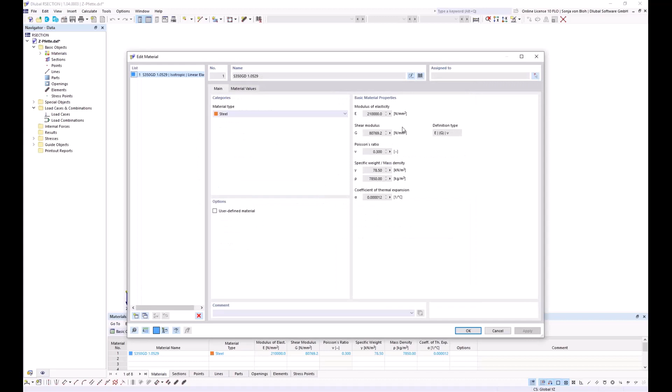Furthermore, I have to define the material here. I just want to use this material that's already shown here, but if I want to use a different material, it would be possible to open the material library and select the material from there. Okay, click here on Cancel. Then I start the import process and click on OK.

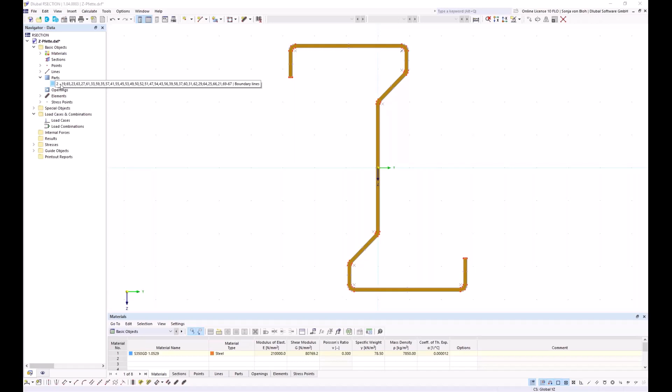With this import function, the part is created automatically, and also the elements are created automatically that you can see here. The elements are required for the calculation using the thin walled analysis and for the calculation of the effective cross-section.

I now want to go into the base data, and here I choose the analysis method. Two analysis methods are available: the finite element analysis and the thin walled analysis. I choose the thin walled analysis. As already mentioned, elements must be defined for this. This setting only affects the default setting in RSTAB. If necessary, I can change the analysis method in RSTAB.

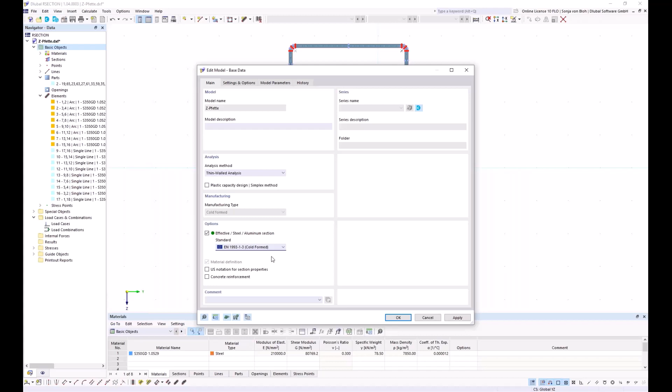Furthermore, I activate the add-on Effective Steel Section, and I choose the standard Eurocode 3 Part 1.3 for cold formed cross sections. This setting is necessary so that the steel design in RSTAB is carried out according to the standard for cold formed cross sections. Then I click on OK.

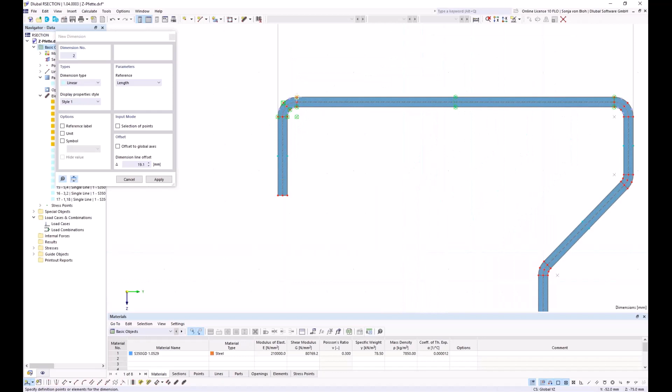It's also possible to dimension the cross section. I will do this. For this, I create a new dimension, and then I choose the corresponding points. These dimensions can also be displayed in RSTAB.

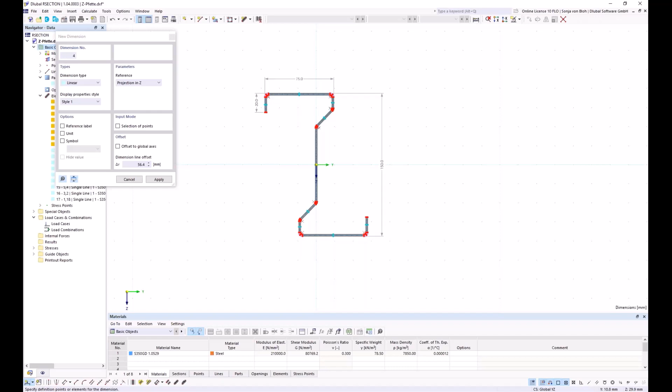In RSECTION, I can also calculate the effective cross-section and the stresses. This is useful, for example, for a preliminary design. This has been demonstrated in previous webinars, so I won't go into it today. However, it makes sense to start the calculation once to find any modeling errors. I will do this. Here I go to Calculate All, and no error was shown, so it's possible to import this cross section into RSTAB.

Then I save this file. Click here on Save, and I will save it in this directory. Then I can switch to RSTAB.

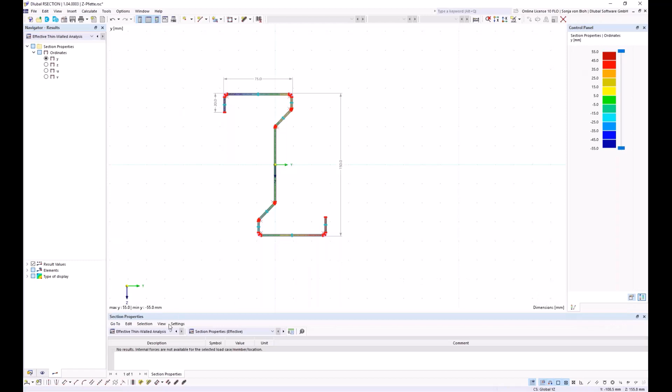I have already created the steel hall in RSTAB. The purlins consist of the cross section just created in RSECTION. For now, I have assigned this cross section to them, and I want to modify this cross section.

For this, I open the Edit Section dialog, and then I open my cross section library. And then I want to import my created cross section in RSECTION.

The folder in which the RSECTION cross section is stored must be integrated into the Dlubal Center. It's only possible via the Dlubal Center to import a cross section from RSECTION. And I want to put this folder directly under the project.

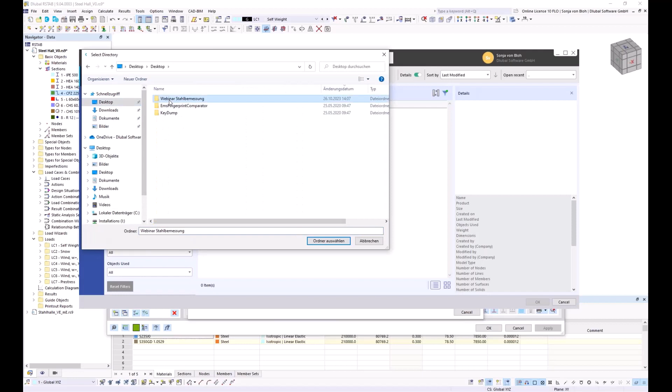So I right-click, choose Add Existing Project here from the context menu, and then I choose my folder. It's here on the desktop. And then I click on OK.

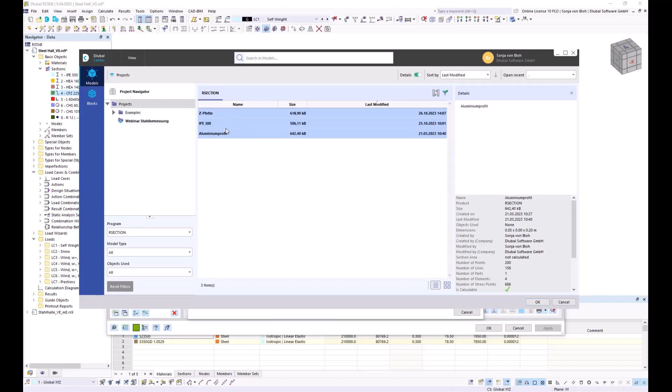The folder is now linked to the Dlubal Center, and I can select the R section cross section. It has recently become possible to import multiple cross sections in one step. For this, I have to select this cross section, and then I can click on OK, and all the selected cross sections will then be imported into RSTAB. Now I only want to import this cross section, so I click on OK.

Here the checkbox thin-walled model is activated. This setting was taken from the chosen analysis method in RSECTION. However, I can also deactivate this option here so that the calculation of the gross cross-section properties is then carried out using the finite element analysis. If this option cannot be selected, then no elements are defined in the R-section cross-section.

You can see here in the graphic of the cross-section that the dimensions are shown. These are the dimensions I have created in RSECTION. And I click here on OK.

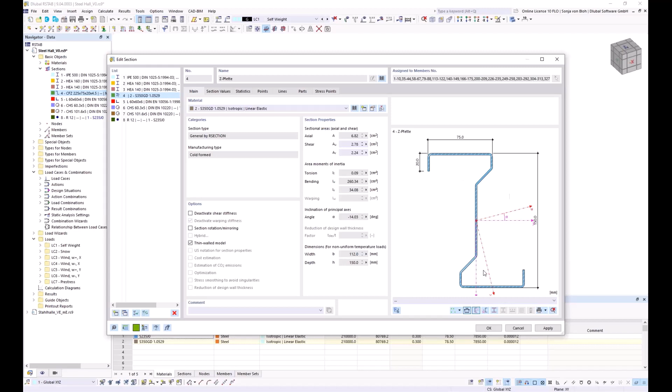For cold-formed Z cross-sections, the center of shear lies outside the cross-section and the main axes are rotated. Usually, the loads don't act on the shear center, which results in double bending and torsion. Usual lateral torsional buckling checks cannot be carried out.

Eurocode 3 Part 1.3 includes design methods for cold-formed Z purlins, but the purlins must be within certain limits. These simplified design methods are not implemented in steel design. The lateral torsional buckling of any purlin can be carried out according to the second order theory, considering warping torsion and the use of equivalent imperfections. I would like to show this approach today.

For the calculation considering the warping torsion, I first activate the add-on warping torsion in the base data. For this, I go to the base data, on top add-ons, and then I activate this checkbox here.

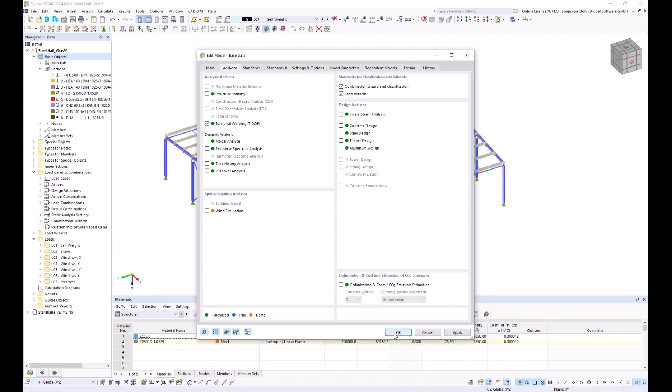Warping at the member ends is assumed to be unhindered by default. To transfer the warping between members that are connected, you can define a set of members.

The frames consist of several members. You can see it here. These members are divided, and this means that there are warping releases between each member.

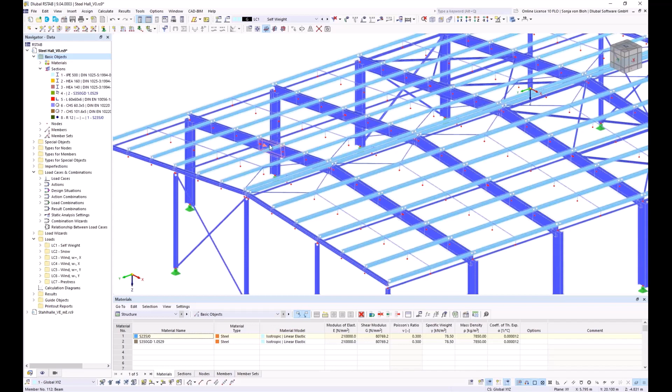The warping should be continuous for the frames, so I've already defined a set of members for them.

I show you this in the wireframe model. Here I've created the set of members for each frame. And if I open the edit set member set dialog, then you can see here a checkbox discontinuous torsional warping.

This option controls whether the warping should be transferred or not. This is supposed to be transferred, so I don't check this checkbox.

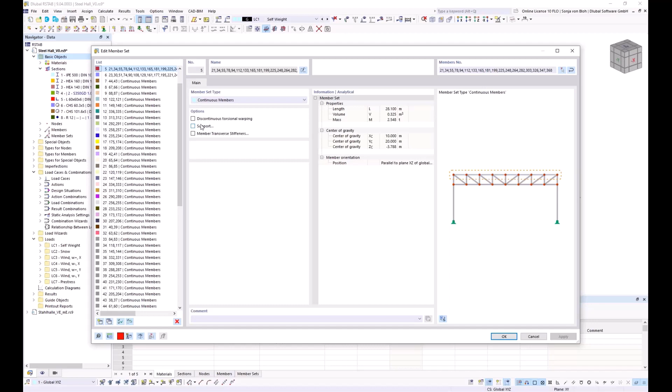Furthermore, the purlins are divided at the connection point here with the purlin suspensions, and the warping should be continuous for the purlins. So I've defined set of members for the purlins too. You can see it here.

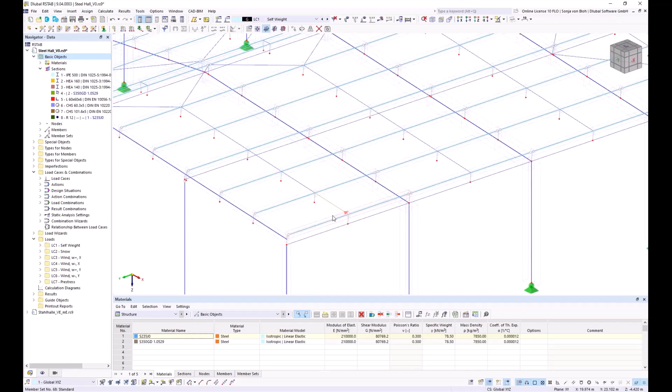When calculating with 7 degrees of freedom, the connection of members is always assumed to be at the center of gravity. If the connection is to be made at a different point, you can use member eccentricities, or you can also model the connection with rigid members.

In the steel hall, I have already defined member eccentricities for the transoms, the purlins, and the purlin suspensions. To do this, it's necessary to activate the checkbox eccentricity in the member dialog.

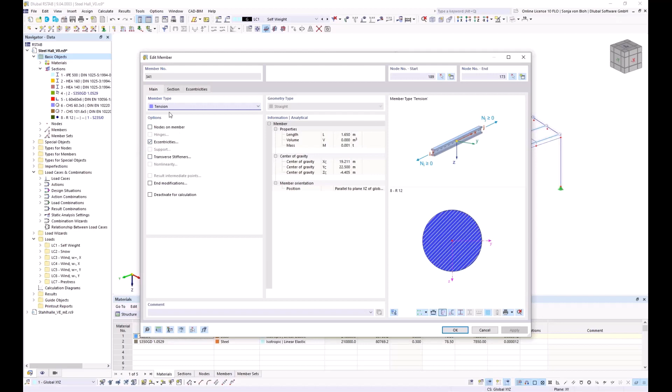I have done this here for the suspension. Here I've activated this checkbox eccentricities, and here in the tab eccentricity, it's possible to assign a member eccentricity to this member. And I want to also look into this definition of the member eccentricity.

You don't have to calculate the eccentricities manually. You can also define them relative to another cross-section. I have used this option here. I have defined the eccentricity type relative to sections, and I have defined a transverse offset from the section of another member, so that the eccentricity is calculated automatically via the program.

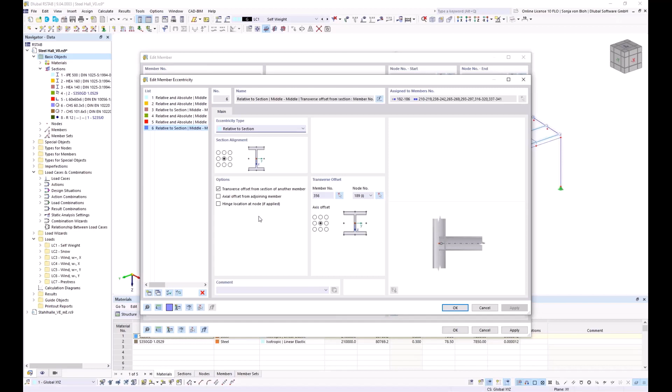The steel hall is covered with trapezoidal sheeting. I would like to use the trapezoidal sheeting as lateral and torsional support. I can take this stabilizing effect into account in RSTAB using shear panels and rotational restraints.

I first define the shear panel. I can do this via the navigator data. Here under types for members, I see member shear panels. I create a new one. There are different types of shear panels to choose from: trapezoidal sheeting, or a bracing, or trapezoidal sheeting and bracing. I want to define a trapezoidal sheeting, so I choose this type.

Then I go to the tab trapezoidal sheeting, and I choose the trapezoidal sheeting from the library. I go here, and then I define this trapezoidal sheeting. It's a Hoesch T50.1 0.75. I click on OK.

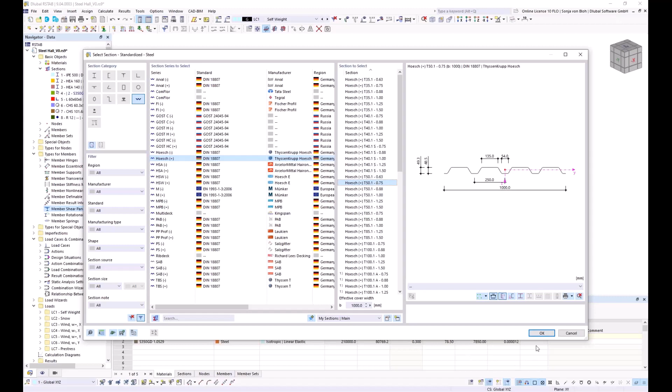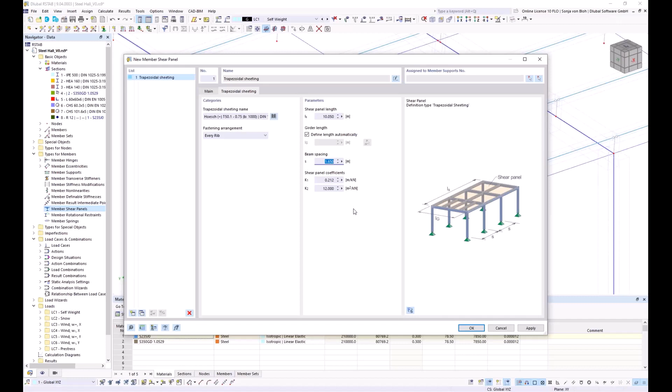The trapezoidal sheeting is fastened in every rib, so I choose this option here. The shear panel length corresponds to my roof length, and I can pick this graphically. I choose measure, then I choose my nodes, and now the shear panel length is defined as 10.05 meters. Then I have to define the beam spacing. I will do this also graphically. I measure the spacing between the purlins, and then I click on OK.

Next, I define the rotational restraint. I find this also in navigator data here. I create a new member rotational restraint. There are different rotational restraint types, continuous or discrete. For the trapezoidal sheeting, the restraint type is continuous.

Then I go to the tab continuous. The trapezoidal sheeting and the material can then be selected from the database. The purlin spacing and the continuous beam effect still need to be selected. The spring stiffness C100 must be determined depending on the load.

Unfortunately, the effect of cross-section deformation on rotational restraint can only be calculated for I cross-sections, but not for Z section cross-sections. The calculated spring stiffness would therefore be on the unsafe side, so I have determined the spring stiffness manually according to the formulas described in Eurocode 3 part 1.3.

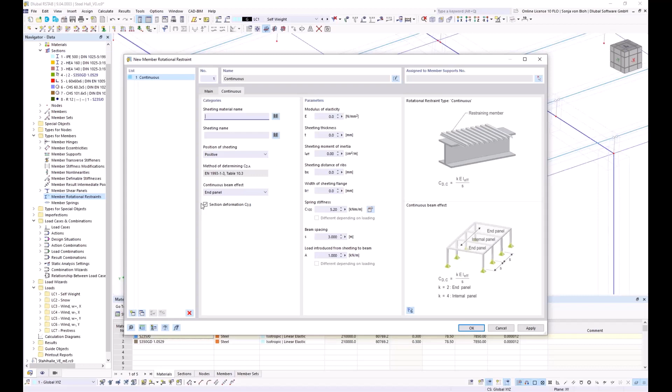I would like to consider the spring stiffness, so I go back to the tab main, and then I choose here the type manually. I define the rotational spring stiffness. I've calculated it to 1.07 kilonewton meter per meter.

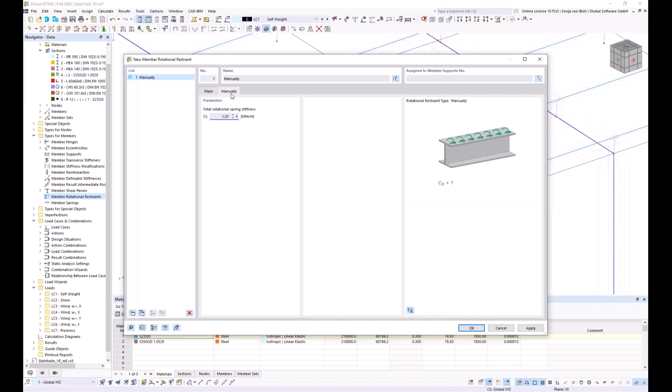I click here. I now have to assign the shear panel and the rotational restraint to member supports. I'm creating a new member support. I will do this also via the navigator data. I create a new member support, and then I choose my shear panel in Y and my rotational restraint about X.

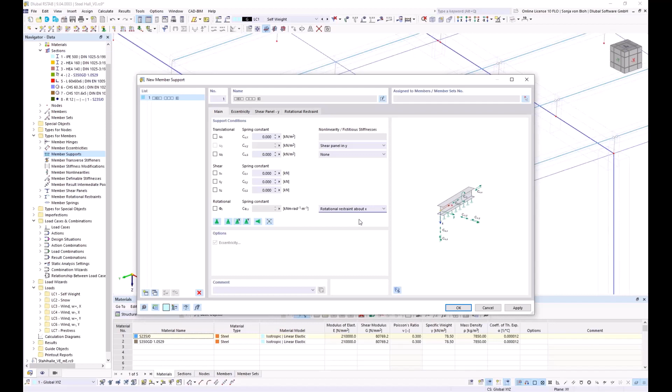The trapezoidal sheeting lies on the top of the purlin, so I define an eccentricity, and here I define the reference on the top. Then I go to the tab shear panel in Y. Here I choose the shear panel type I've just created, and I will do this also for the rotational restraint, choosing the manually defined rotational restraint.

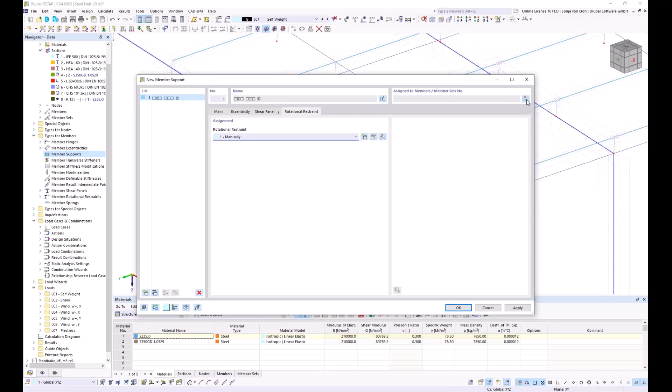I now assign the member support to the corresponding members. To do this, I click on Pick Members, and I use visibility for it. Here I use a generated visibility. I choose the cross-section of my purlin. Then I activate the visibility, and then I choose my members. Then I click OK and OK, and then the shear panel and the rotational restraint are assigned to these members.

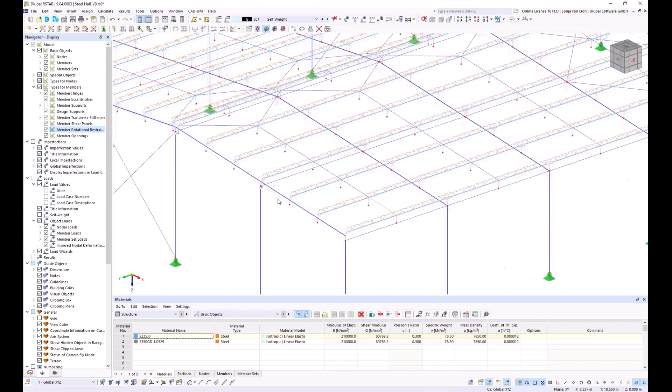It's also possible to display the rotational restraint and shear panel graphically. To do this, I go to the navigator display, and you can find the checkboxes under types for members. I activate member shear panels and member rotational restraint. I will see it if I cancel the visibility mode. Here you can see now the shear panel and rotational restraint graphically. I can uncheck these checkboxes again since I don't need it now.

By default, rotational restraint and shear panel are not taken into account in the static, stability, and modal analysis. I can also take these into account in these analyses by using a structure modification, and I want to create this structure modification. I find it in navigator data under special objects, and here I define a new structure modification. The consideration of shear panels and rotational restraints is already activated here via this checkbox, and then I modify the name of this structure modification.

I name it consider shear panel and rotational restraint.

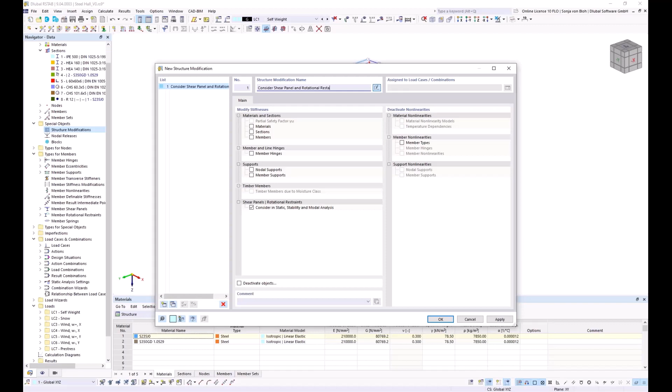I click on OK. I then have to assign this structure modification to the relevant load cases or load combinations in which it should be taken into account. For this, I use the combination wizard, found in navigator data. The only thing I have to do is check the checkbox for considering structure modification, and choose the corresponding structure modification.

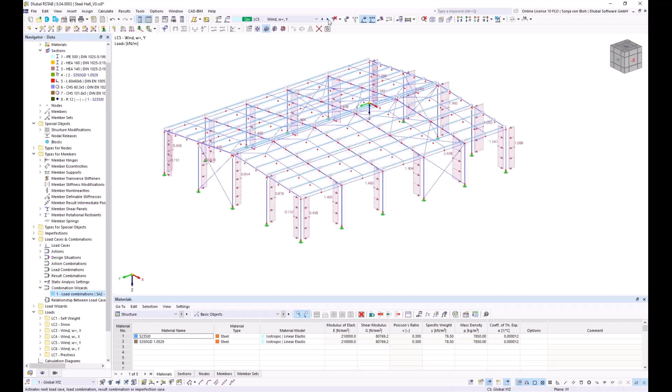I click on OK. I've already defined dead load, snow load, wind in X direction and Y direction. I will show you this by activating the view. Here I have the load case self weight, then snow, also wind in X direction and Y direction, and also a pre-stress on the bracings.

I want to go back to my loads that I've applied on the purlins. If a member load without eccentricity is defined, the load always acts at the center of gravity in the calculation with 7 degrees of freedom.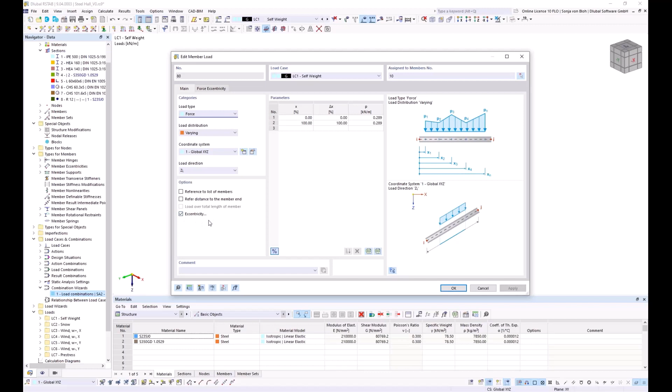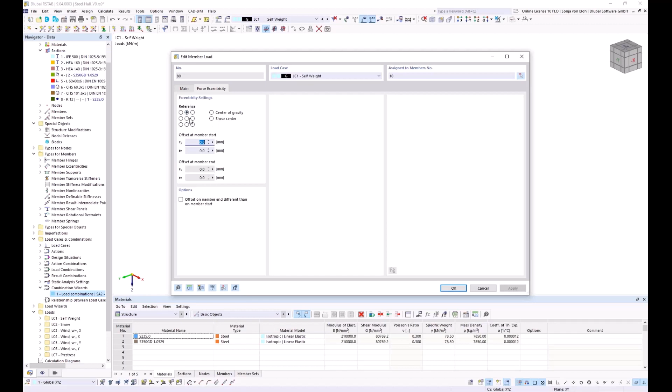I will go into this load, and here I have the possibility to define an eccentricity. If the load acts on another position, it's possible to change this via an eccentricity. I've activated the eccentricity checkbox, and in the force eccentricity, it's possible to define the eccentricity for the loads. The load should act on the top of the cross section, so I've defined the reference on the top. Click here, okay.

I've already created global imperfections. I will show you this now. I've created global imperfection in plus X direction and also in plus Y direction. I now have to define the initial bow imperfection for the purlins.

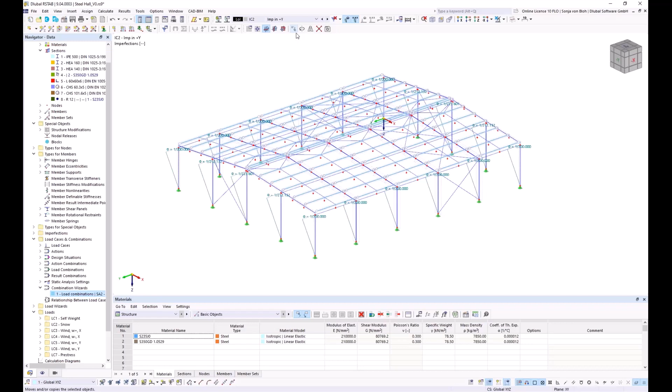Various options for defining imperfections have already been demonstrated in previous webinars. Today, I would like to show the definition of local member imperfections. The purlin is here supported in a Y direction by the purlin suspension, so that a two-wave imperfection shape would be possible. If the suspension is not stiff enough, it would also be possible to have a single wave imperfection shape. For the imperfections, I could now create two imperfection cases.

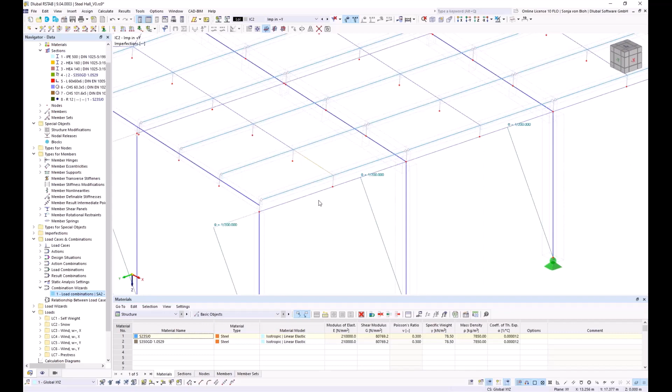However, it's also possible to use a stability analysis to obtain information about the imperfection to be applied and thus reduce the number of imperfection cases. I would like to show this now. I go to my navigator data, then to base data, and here I activate the checkbox for structure stability. Then I click on OK.

I first look at the stability analysis settings by opening this. I assume that local mode shapes for the purlins only appear at higher eigenvalues. Therefore, I increase the number of eigenvalues to be calculated to 25.

In the combination wizard, I activate the stability analysis with the calculation of 25 eigenvalues, and I also change my static analysis settings to first order theory. Then I name this wizard stability.

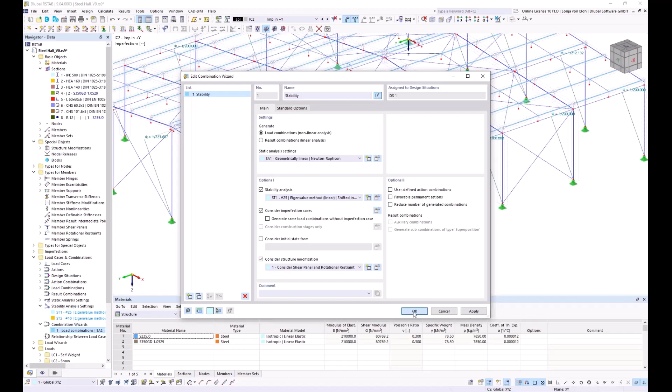I open now the design situations, and here the combination wizard stability is already chosen. Now the load combinations are generated considering the global imperfection, my structure modification, and my structure stability add-on.

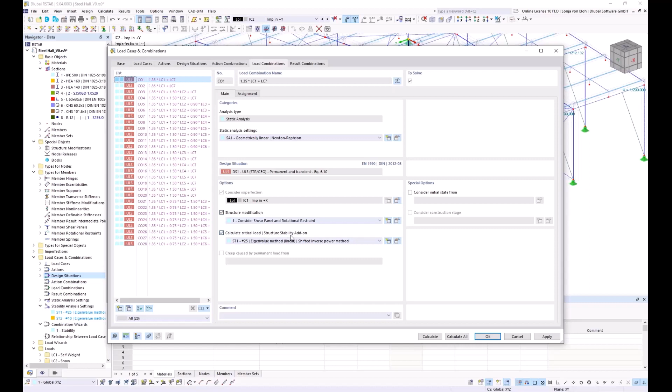I now run the calculation for my design situation 1. A message informs me that the cross sections or topology of the members in the member set are not compatible, and the warping may not be able to be transferred. The reason for this is, among other things, that the set of members of the frame is not straight.

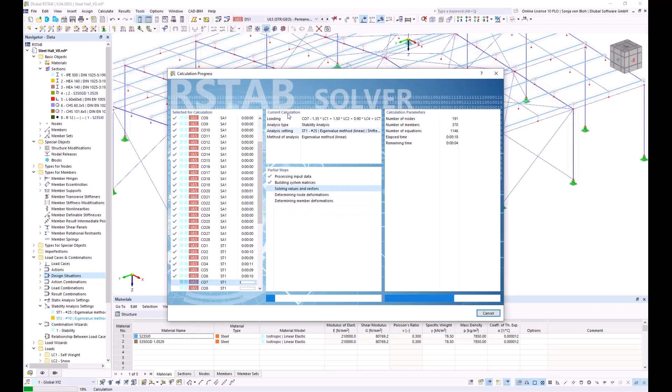You can see it here. The column is here angled to the other frame, and this is the reason for this warning message. I assume that the warping can be transferred through the connection, so I ignore this warning message, and the warping is then transferred.

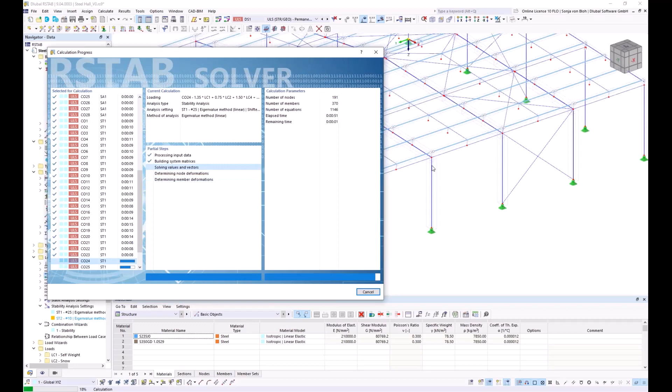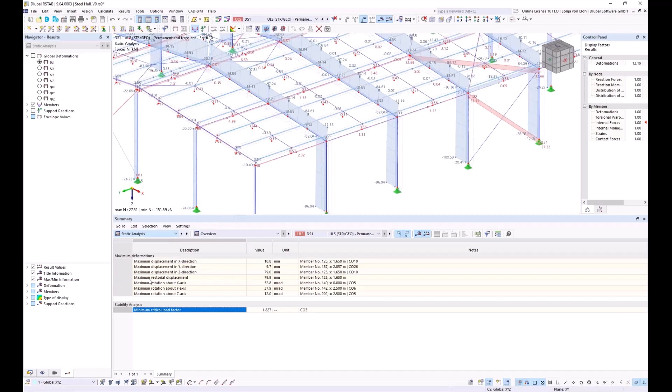Here on the overview, I can see that the minimum critical load factor is calculated in load combination 3. I will go to the stability analysis, and I will open now the load combination 3.

I deactivate here the display of the loads. As a part of the stability analysis evaluation by mode shape, the mode relevance factor can be used to quickly differentiate between local and global mode shapes. A mode relevance factor of 100% means that a single member has maximum relevance for the considered mode shape.

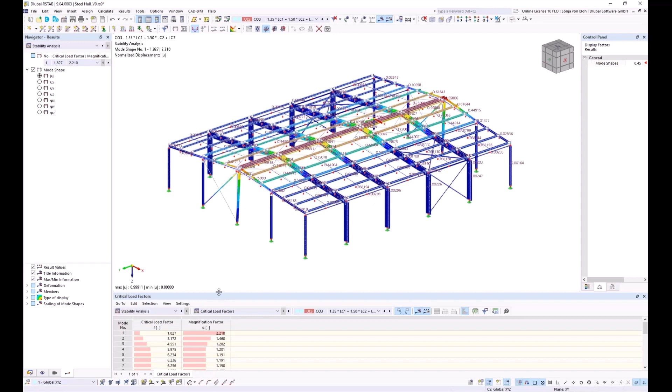To look into the mode relevance factor, I open a different table: results by member, and here effective lengths and critical loads by member, and you can see here this mode relevance factor for all members.

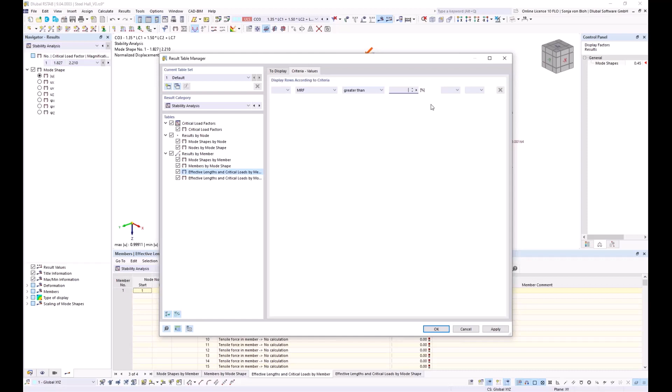I can also use the filter option to output only mode relevance factors that are greater than a certain value. I will do this now. Here I open the result table manager, and I activate this checkbox according to criteria. Here I can choose the mode relevance factor, and I want to see only mode relevance factors that are greater than 70%. I click here on OK.

And then I want to see here my member number 258, and this member has a mode relevance factor of 100%, and this means that it is a local eigenvalue.

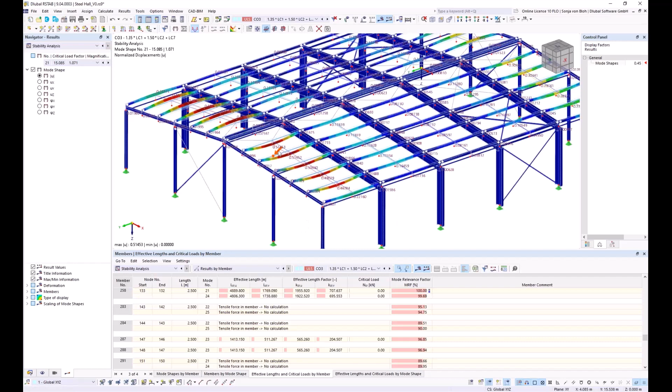And I can see for this also the mode shape, and this is a single wave here for this purlins. So I have only to define a single wave shape for the bow imperfection. I will do this now.

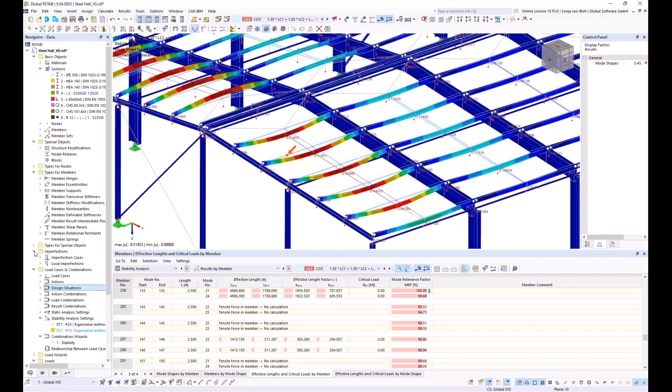For this, I create a new imperfection load case. To do this, I open the navigator data again, and then I create here a new imperfection case. I name it imperfection plus Y direction, and I choose here the imperfection type local imperfections.

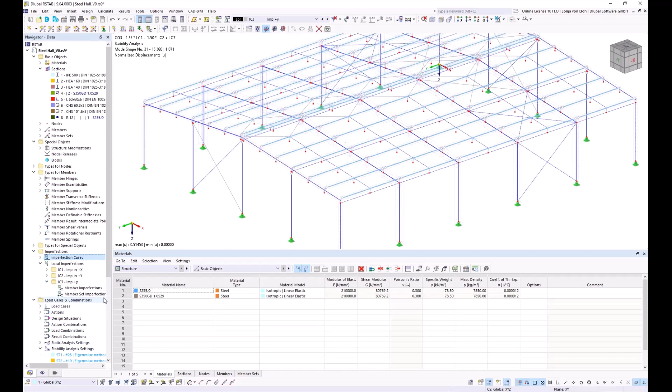I now have to define the local imperfections, and I define a new member set imperfections. And here I choose the imperfection type initial bow, and as definition type, I choose manually relative. And for the Z cross-section, I use according to table 6.3 of Eurocode 3 part 1.3, the buckling curve B, so that I define an initial bow of 1 divided by 250, and I want to assign this initial bow to the

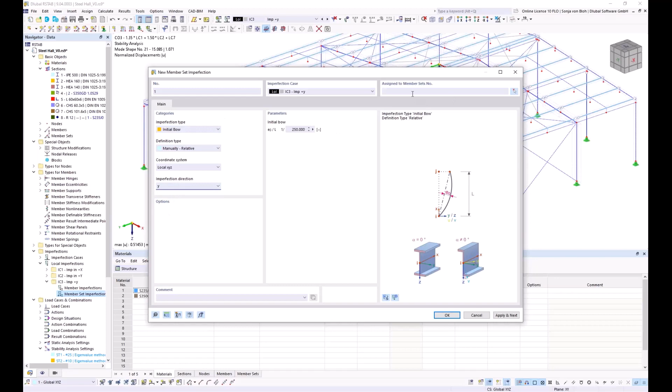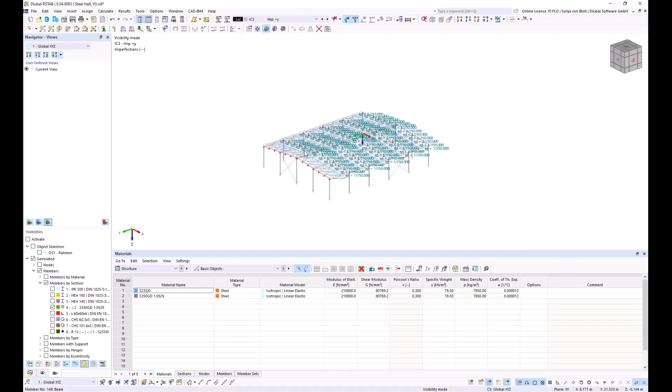imperfection direction Y. Now I have to choose the member sets, and I activate here my visibility once again. I choose then the member sets, and I click on OK. I can show this also graphically if I activate the Show Imperfection button.

And I now have to define the imperfection also in the opposite direction, and I will do this by copying the imperfection case, imperfection plus Y. To do this, I go to the navigator data again, and I open here my imperfection case. I choose it, and then I click on button copy selected imperfection case. I rename this case, and then I click on OK.

And all I have to do now is change the imperfection direction to minus Y.

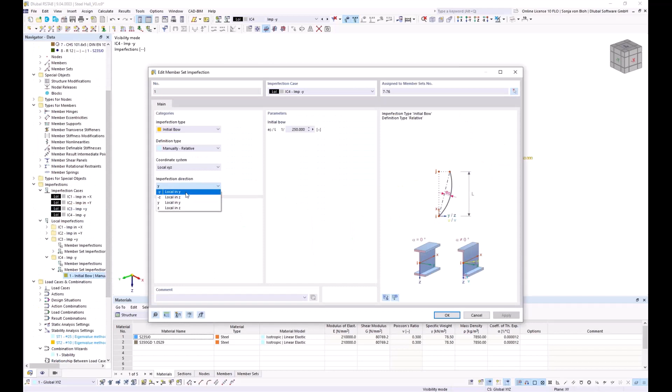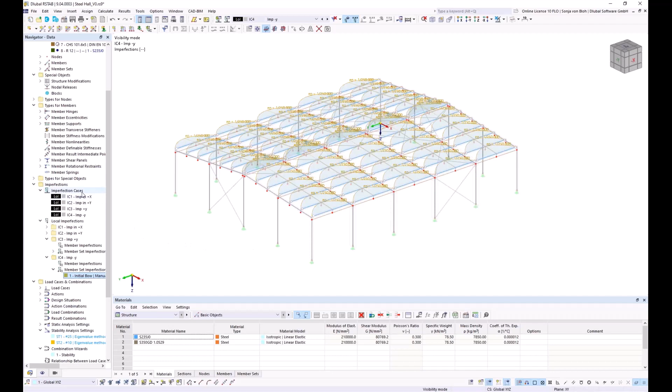I would now like to combine the imperfections with each other. For the combination of imperfections, I create a group of imperfection cases, and I will do this here in the Edit Imperfection Case window. Here I create a new imperfection case from imperfection type group of imperfection cases, and I want to combine first my imperfection in global X direction with my imperfection in plus Y direction.

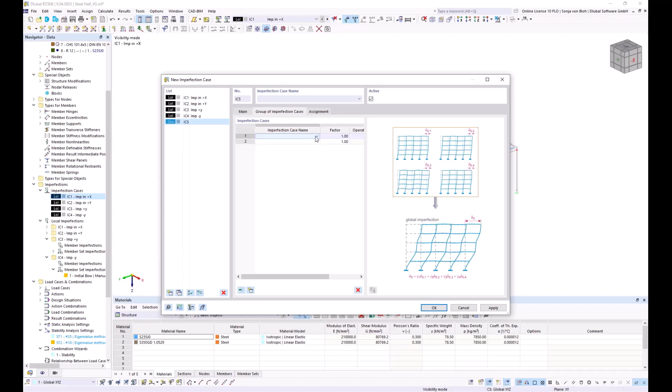For this, I go to the tab group of imperfection cases, and then I create a new line, and here I choose imperfection in plus X with the operator and imperfection in plus Y, and I name it imp plus X plus Y. The other imperfections I create by copying.

So I select this group of imperfection, and then I click here on copy selected imperfection cases. And here I change the parameters to minus Y, and I need this also for the global direction Y. So I copy this.

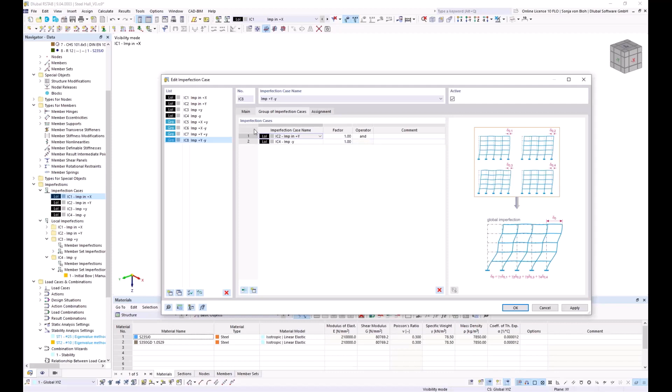And all I have to do is change here the name and the imperfection. So that the individual imperfections are not taken into account in the combinatorics, I deactivate for them the checkbox active, and then I click here on OK.

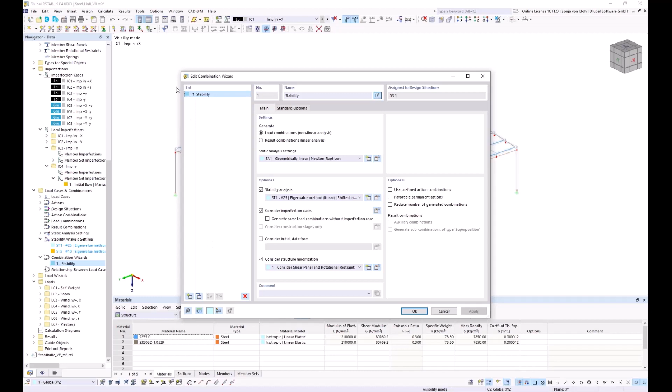Then I have to modify my combination wizard, or create a new combination wizard for my design situation. For this, I open the combination wizard dialog and I copy the stability wizard, and I name it here design. And I want to do my design according to the second order theory.

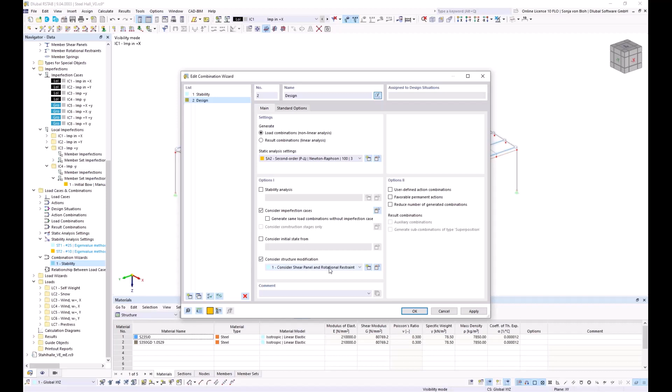So I choose here second order. I don't want to use the stability analysis anymore, and I want to consider my imperfection cases and my structure modification. Then I click on OK.

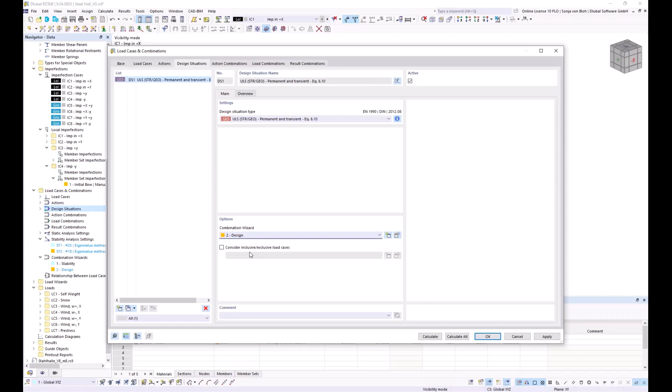I now have to assign this combination wizard to my design situation. For this, I edit my design situation, and here I choose now the combination wizard for the design. If I go here, then I can see the results for my load combination. Here the imperfections are considered and also the structure modification.

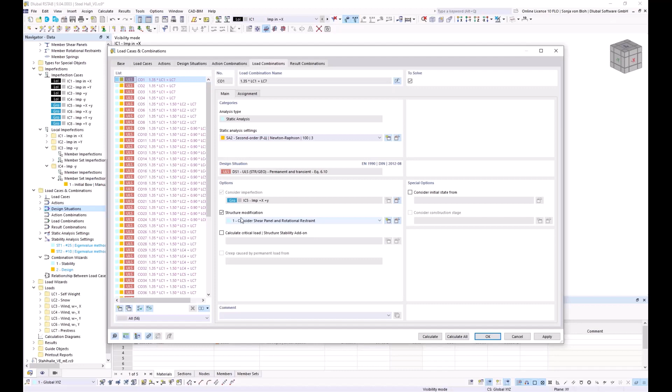The structure is complete so that I can make the settings for the steel design. For this, I first activate the steel design add-on in the base data. In the base data, here on tab add-ons, I activate here the steel design, and on the tab standards, I select the standard that I want to use.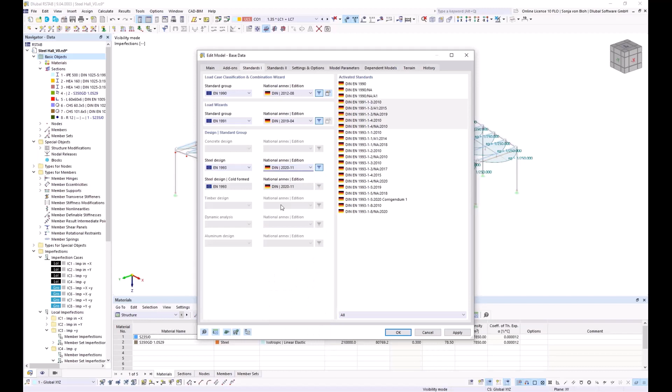I select here the Eurocode 3, and I select the German National Annex. And click then on OK.

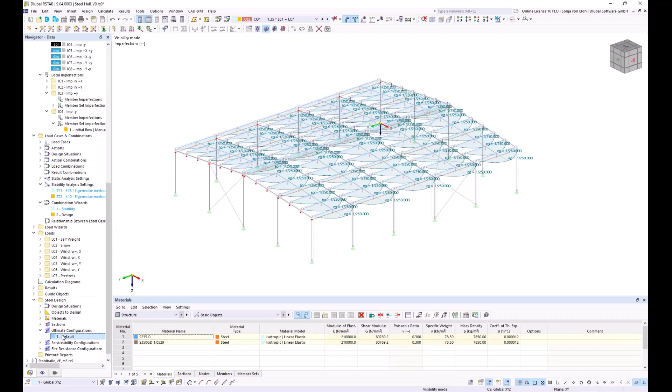I now want to look into the ultimate configuration for the steel design. I find it here also in Navigator Data, Ultimate Configuration. And here I deactivate the checkbox Perform Stability Design, since all stability effects are already included in the calculation.

Therefore, only cross-section checks have to be carried out, but with the partial safety factor gamma M1 for stability designs. For this, I have to activate this checkbox.

In chapter Design of Cold Form Sections, the steel design derives from the manufacturing type whether the design must be carried out according to Eurocode 3 Part 1.1 or Eurocode 3 Part 1.3 for cold formed cross sections. If I deactivate here this checkbox Perform Designs of Cold Form Sections, then the design would be carried out according to Eurocode 3 Part 1.1.

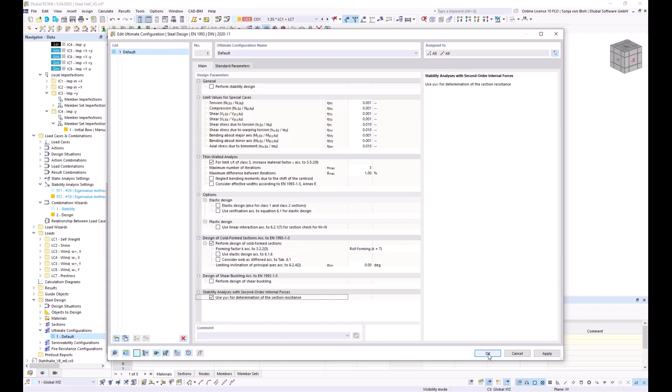Then I click here on OK.

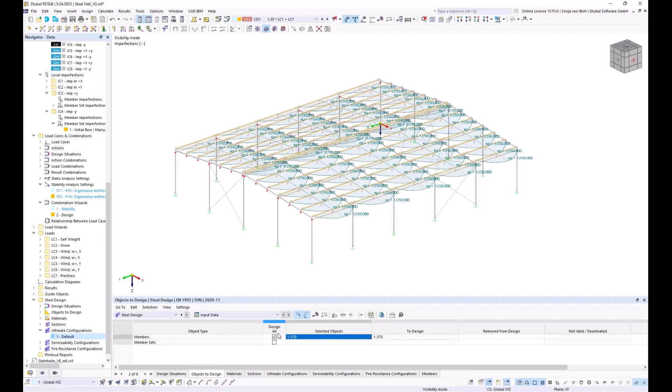In the table steel design, and in the add-on steel design tab Objects to Design, I choose the members that I want to design. I want to design all purlins. I deactivate the checkbox for member sets, and then I choose the purlins. I activate the visibility first, then select all my purlins, and click OK.

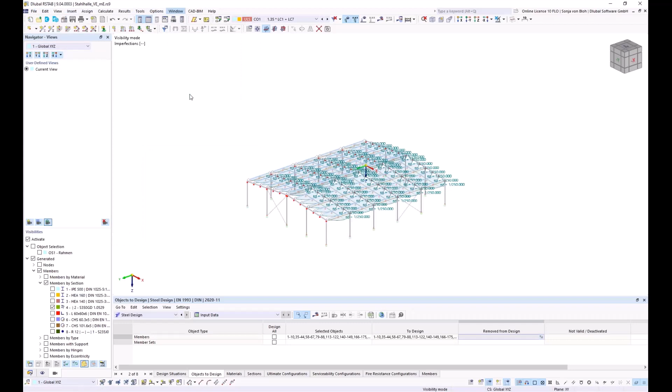The calculation takes time because the effective cross-section is calculated in an iterative process. I therefore show you the results in an already calculated model.

Here I go to the design ratios on members. In the table, the numerical results of the design are shown. To display the details, I double click on the corresponding table row.

Separate effective cross sections are calculated for axial force, major axis bending, and minor axis bending. According to information from the Standards Committee of Germany, the effective cross-section can also be calculated for the combination of internal forces in a design with 7 degrees of freedom using imperfections. We will implement this in the future.

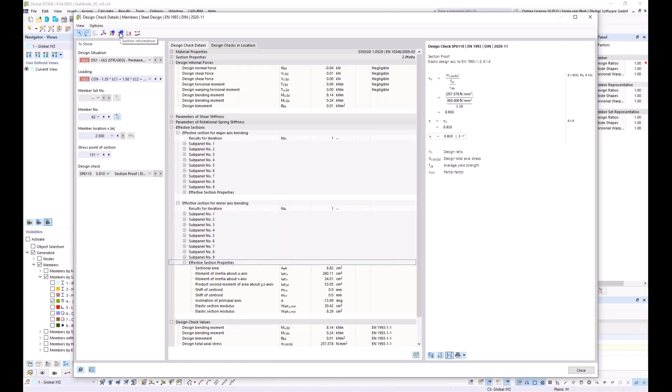The effect of distortional buckling is determined using the finite strip method. You can display the mode shape via this button here, section information, and here we have the buckling shape for only axial force, for major axis bending, and for minor axis bending.

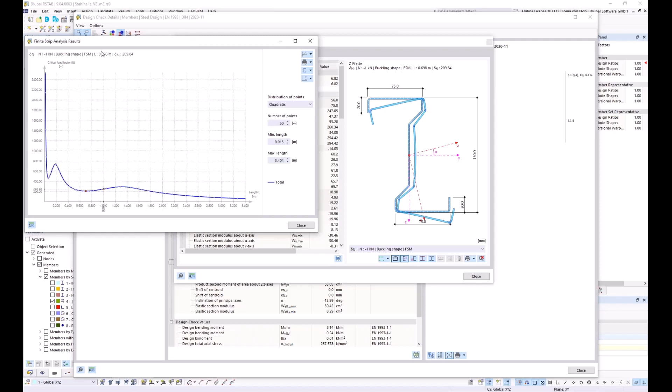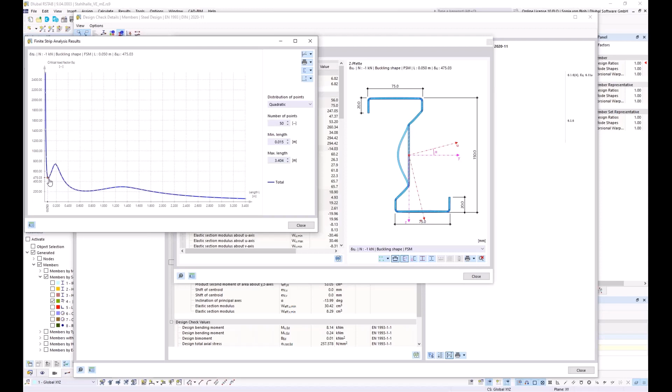I will show you the buckling shape for only axial force. By default, the mode shape for distortional buckling with the associated critical load factor shown here is displayed first. By clicking on the point on the graphics, further forms of instability can be displayed. Here you see the instability form for local buckling.

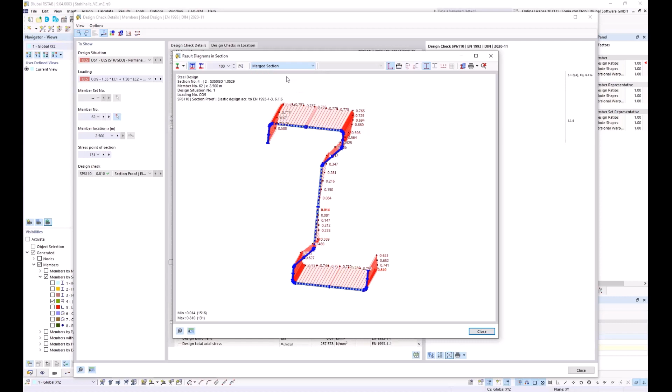The stresses can also be displayed graphically. To do this, I open the result diagrams in section. It's possible to display stresses on the gross cross-section, and also on the effective section. If I want to see the effective section due to minor axis bending, I choose this setting, and I can now see this element is reduced due to local buckling, and here the lip is reduced due to distortional buckling.

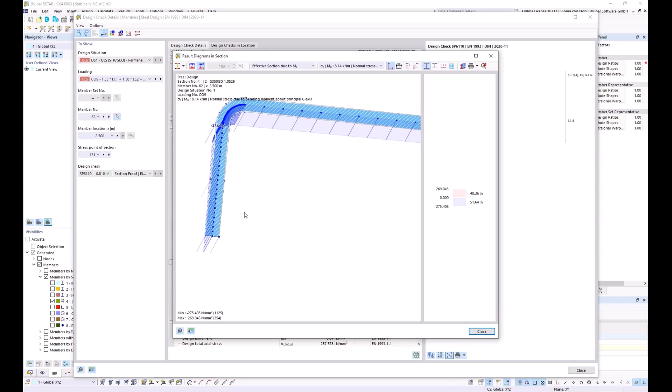The elastic design according to chapter 6.1.6 is carried out. The utilization is below 1 for all purlins, so that the cross-section and stability checks are fulfilled.

That brings me to the end of the webinar. I hope it helps you in designing cold-formed cross-sections and steel design. I now give the floor back to Andreas.

Okay, thank you, Sonja, for this nice presentation. We got some questions. One question was if it is possible to exclude, for example, the restraint for certain load combinations, for example when we have very high wind suction.

Yeah, that's of course possible. We can use different structure modifications for the different load combinations. But in our example it was not necessary, because we have a higher self-weight minimum, it's the same as the wind suction in our example, but that would be possible.